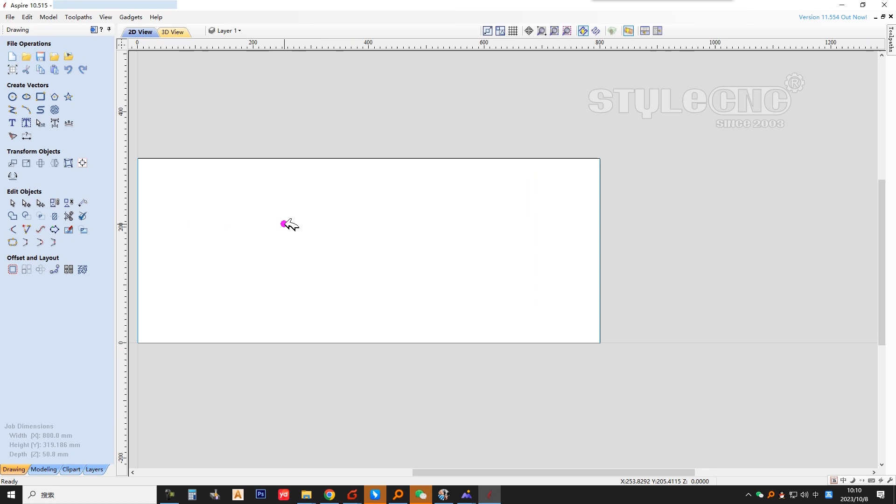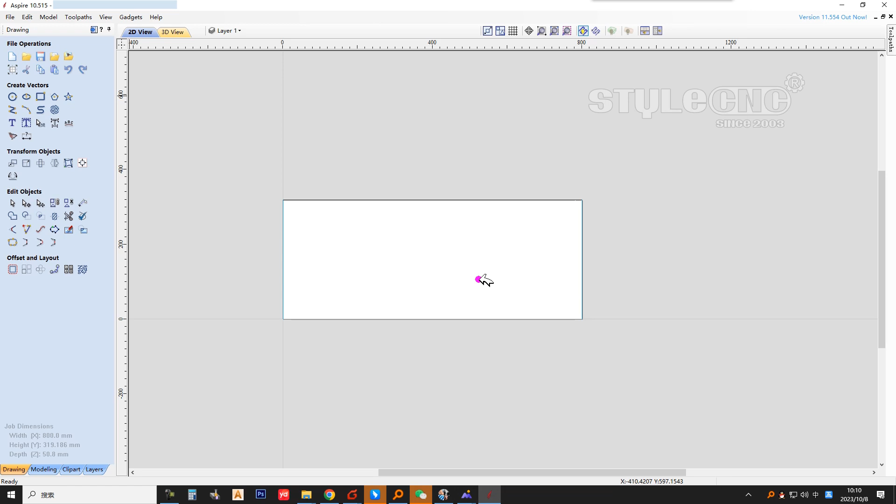Import 3D models. Import files in different formats depending on your work content. After importing the file, you can rotate the model's orientation according to the direction of the engraving.

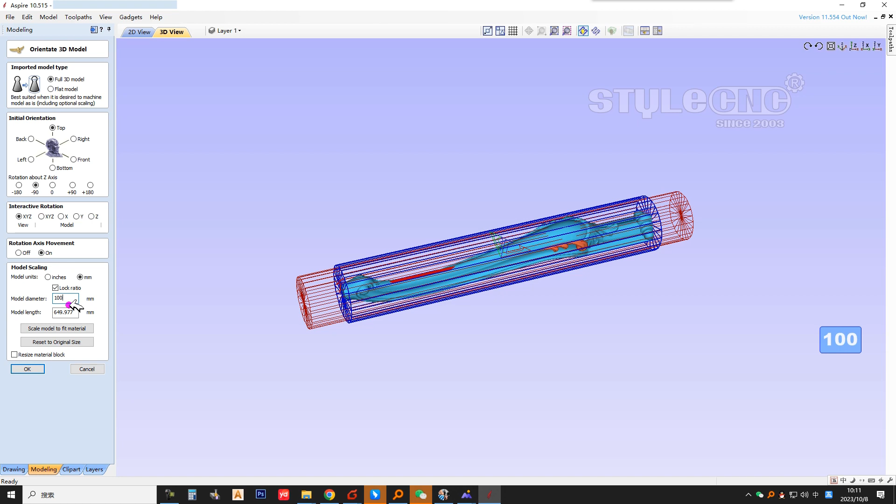Adjust the length and diameter according to the size of your wood, or your actual product size. You can also scale the model proportionally. Notice: do not move the model beyond the wood.

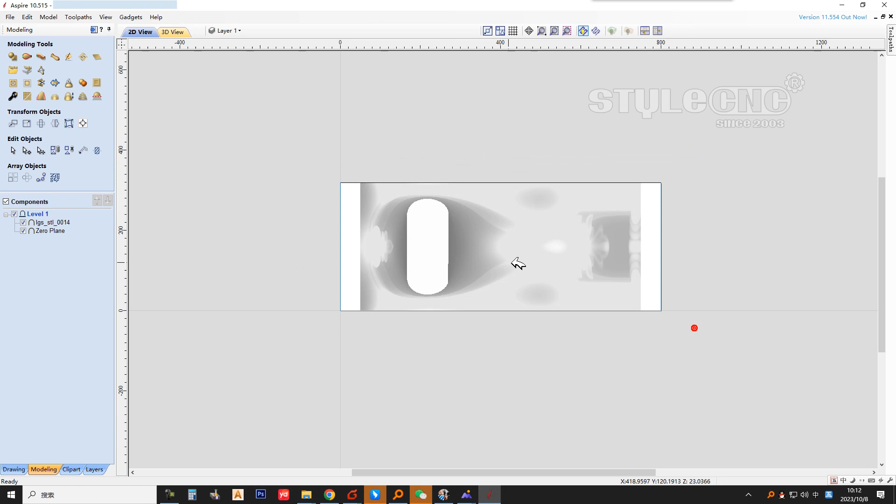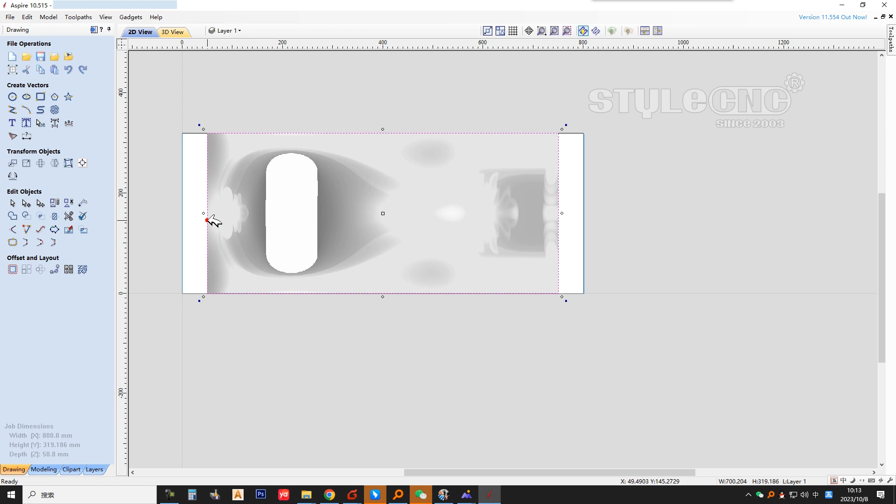A rectangle can be drawn to wrap the 3D model position. Engraving the range within this rectangle. Fine-tune the size of the rectangle. Let the rectangle and engraving range be the same.

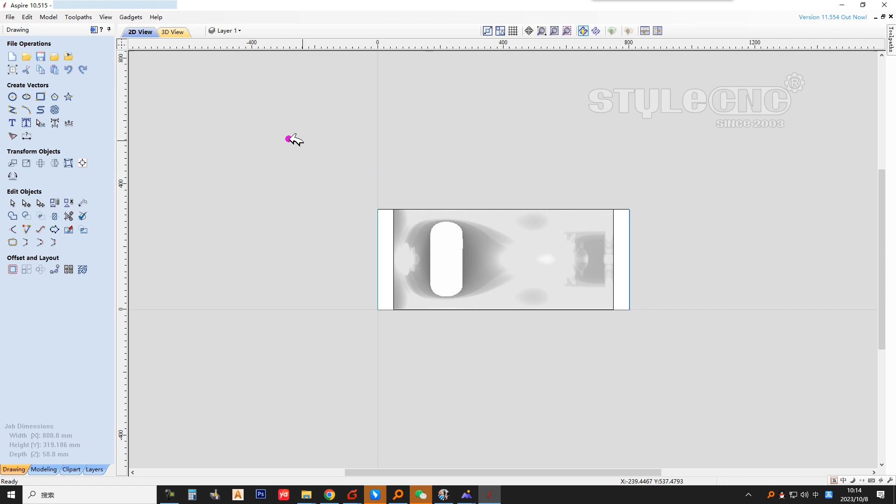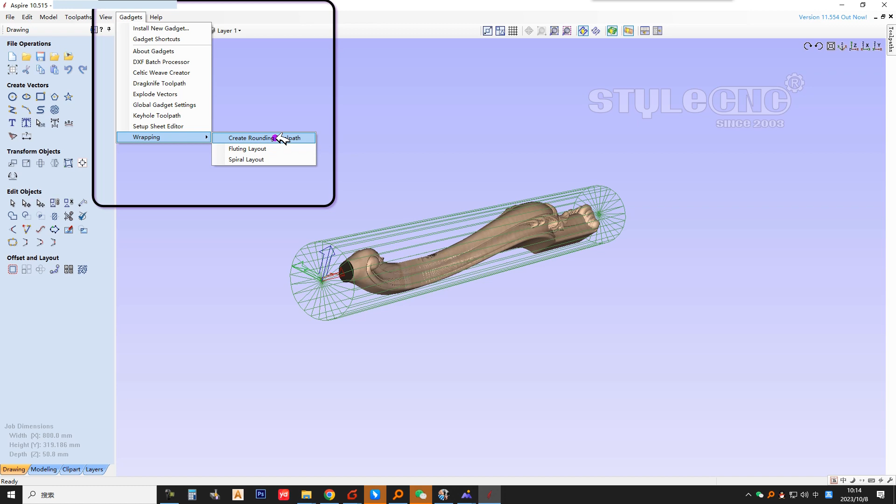If the wood raw material you are using is square, cutting is required, and the square wood is cut into round wood. Measure the dimensions of the square wood and enter them here.

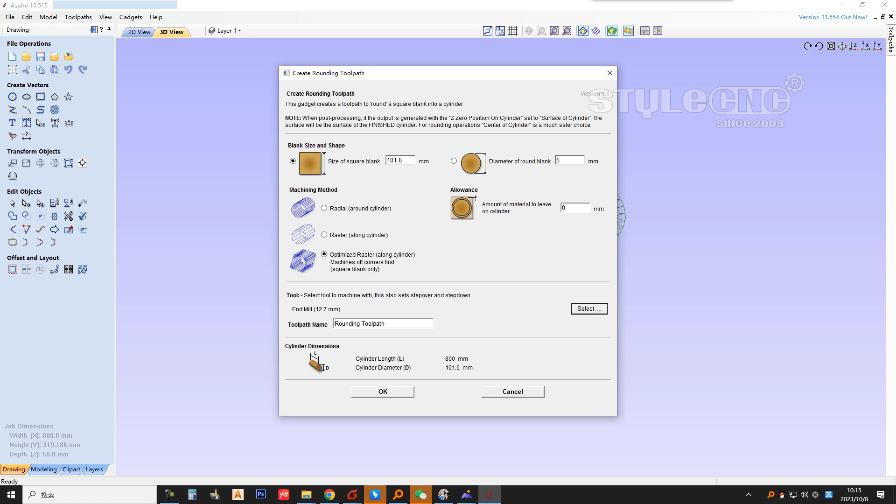Choose a tool, same as roughing tools. After clicking OK, a path for cutting the 4 square corners of the wood will be automatically generated.

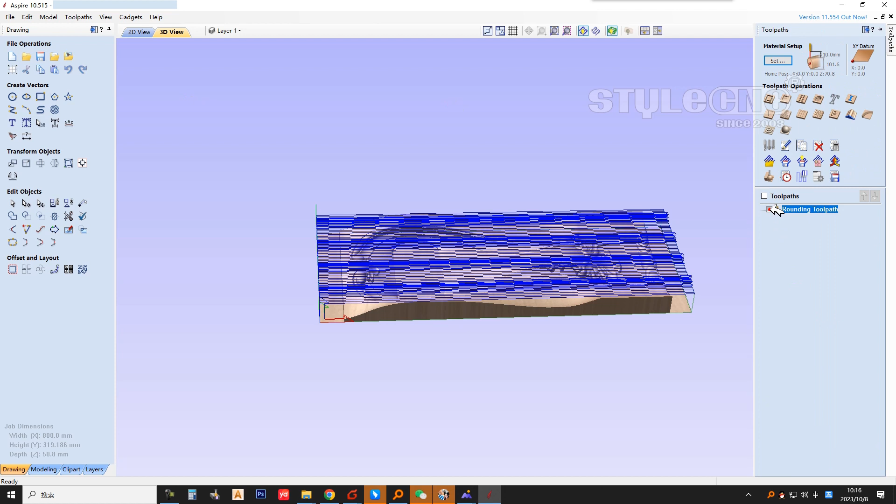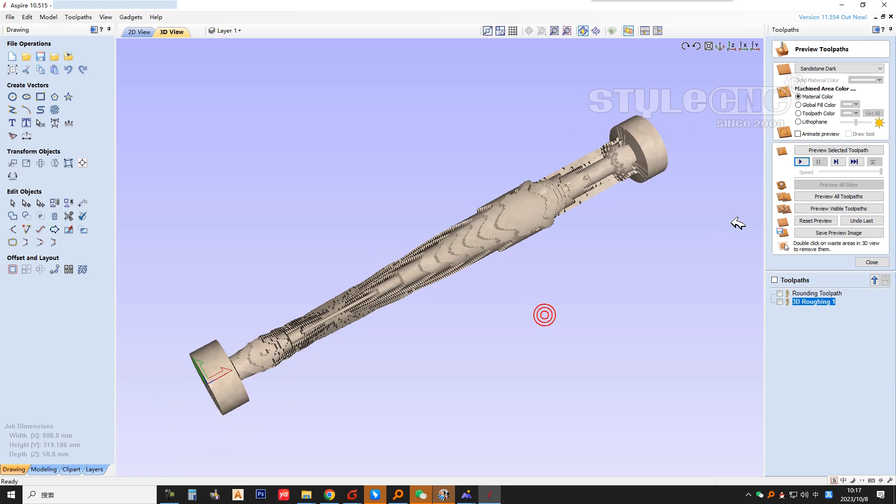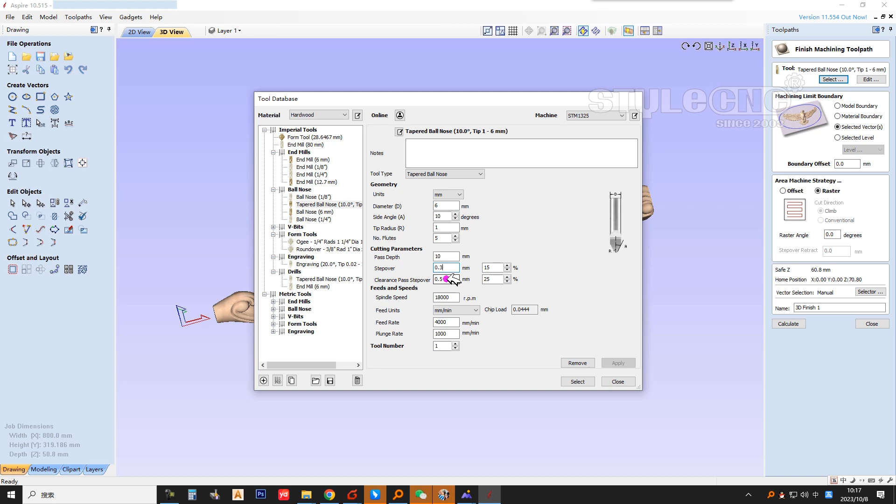Finishing engraving. Select a finishing tool. A round bottom tip tool is best. Depending on the smoothness of the engraving, you can choose an engraving line spacing of 0.1 to 0.5. What I set here is 0.3.

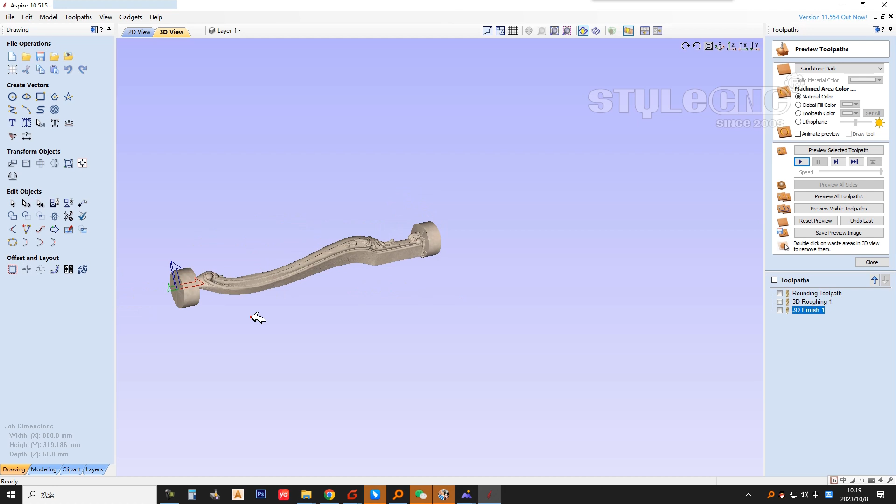Once completed, save the engraving file.

Because what is done here is a 4-axis rotary engraving, so a custom post-processor is used. The x-axis of this post-processor is the long axis, and the y-axis is the rotation direction.

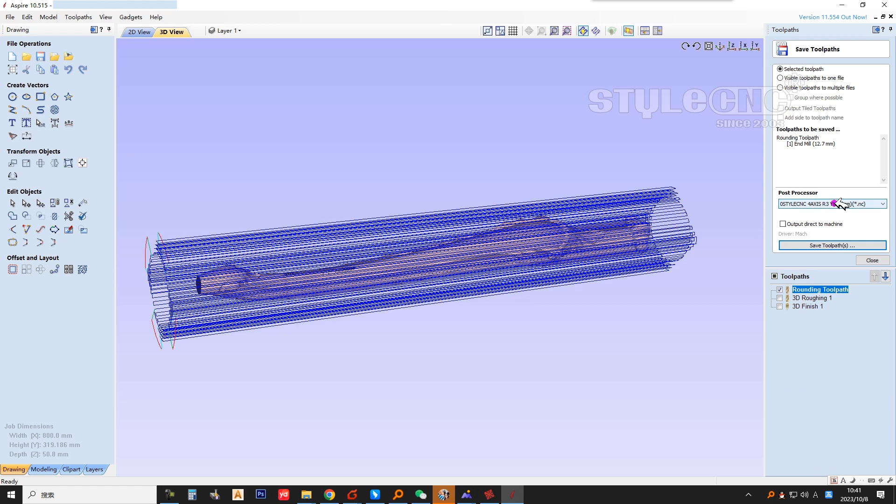Depending on the machine model, it can be saved as one file or multiple files. If your machine supports the ATC automatic change tool function, you can save it as one file. If your machine does not have ATC function, please save multiple files.

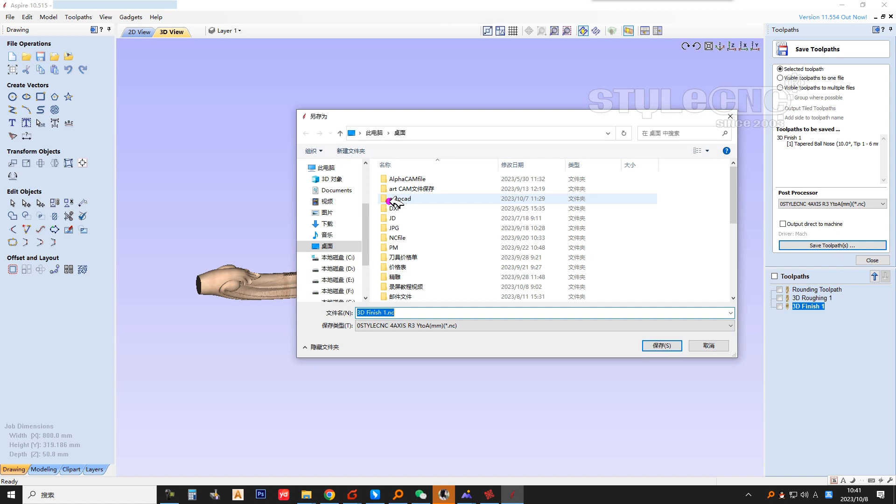If your machine does not have ATC function, please run each file one by one. Note that each file uses the corresponding tool.

Path simulation time.